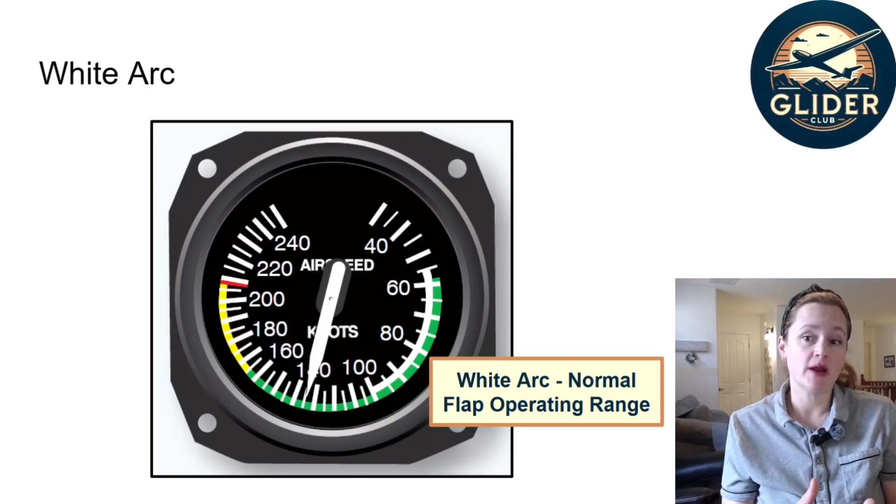Let's start with the white arc, and that is the flap operating range. On this aircraft, it goes from 55 to 100 knots. And even though many gliders have either spoilers or dive brakes, the white arc is specifically for flaps. The bottom and the top of each arc have special V-speed names, and they're written in all capital letters with the letters of the specific speed written lower as a subscript.

The bottom of the white arc is your VSO or stall speed in the landing configuration. That's the stall speed with the power off if the aircraft has an engine, and with both the flaps and gear in the landing position, and that means down. The way I remember is that O stands for out. So it's the stall speed with the landing gear and flaps out.

At the top of the white arc, we have your VFE, or the maximum flap extended speed. Flaps extended, that's what FE stands for. We love landing with flaps because it lowers our stall speed, allowing for slower speeds during approach and landing, but we do have to be careful. While the flap mechanism is pretty tough, you can see how far it extends downward from that wing. So if you fly too fast, the air pressure on it can bend and damage that flap mechanism, and you don't want to do that.

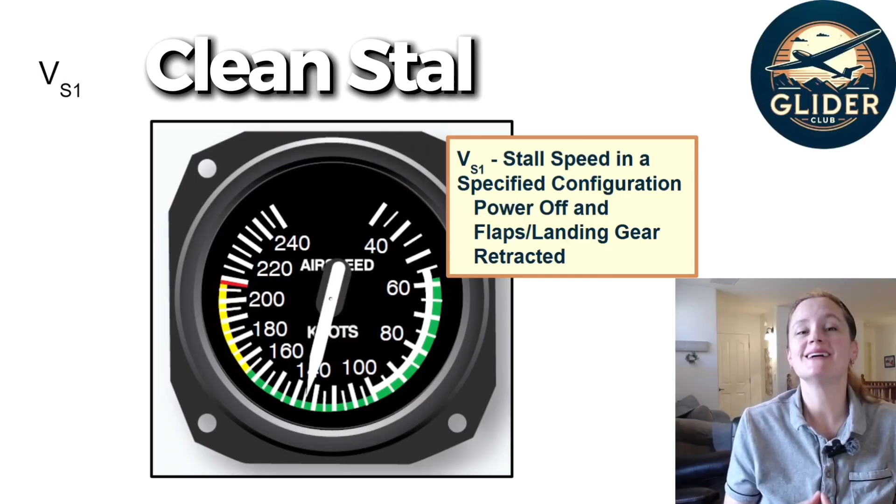Next is the green arc, the normal operating range. And on this aircraft, it goes from about 58 knots to 165 knots. At the bottom of the green arc is your VS1 speed, and the FAA says that's the stall speed in a specified configuration, which is with the power off, again if the glider has an engine, and the flaps and landing gear retracted. You'll also hear this referred to as the clean stall speed. The way I remember this one is to pretend that number 1 is actually a capital letter I that stands for in, I-N. So it's the stall speed with everything in.

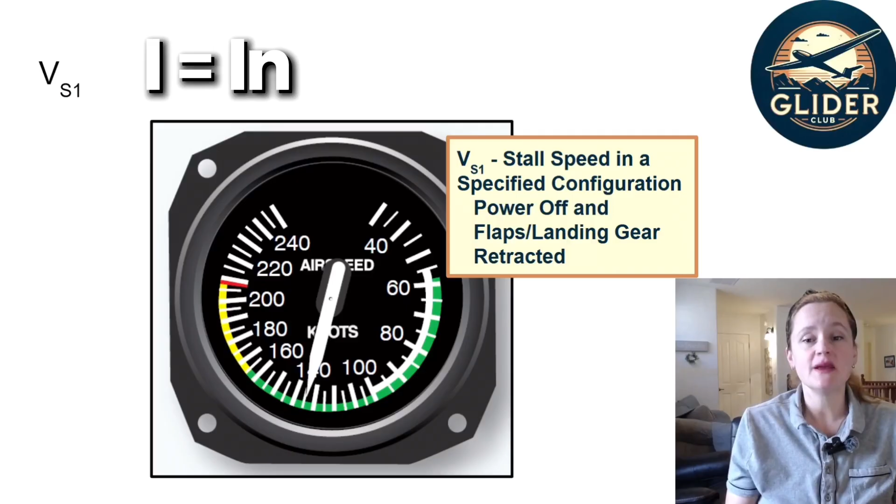At the top of that green arc, at 165 knots, is VNO, the maximum structural cruise speed. That's the speed where anything more than light turbulence could cause structural damage to your glider. Now for the yellow arc, the caution range, which goes here from 165 knots to about 208 knots for this aircraft. We already have a name for the bottom of the yellow arc, VNO.

So let's go to the top of the yellow arc, the red line, and we call that VNE, or your never exceed speed. And the FAA wants you to know that VNE is the maximum you can fly in calm air. So if you're flying on a particularly calm day, usually early in the morning or late in the afternoon, it might just be calm enough that you can fly your glider all the way up to that VNE, or your red line speed.

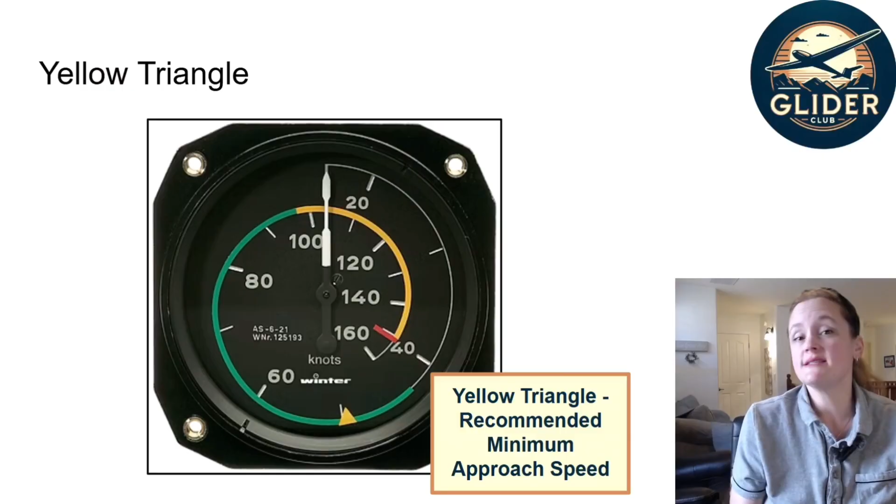In gliders, you'll often have an additional marking, a little yellow triangle, and this is the minimum recommended approach speed for when you're landing. You will often increase your approach speed based on the winds or sink at the time of your landing, but that is the minimum speed the manufacturer recommends.

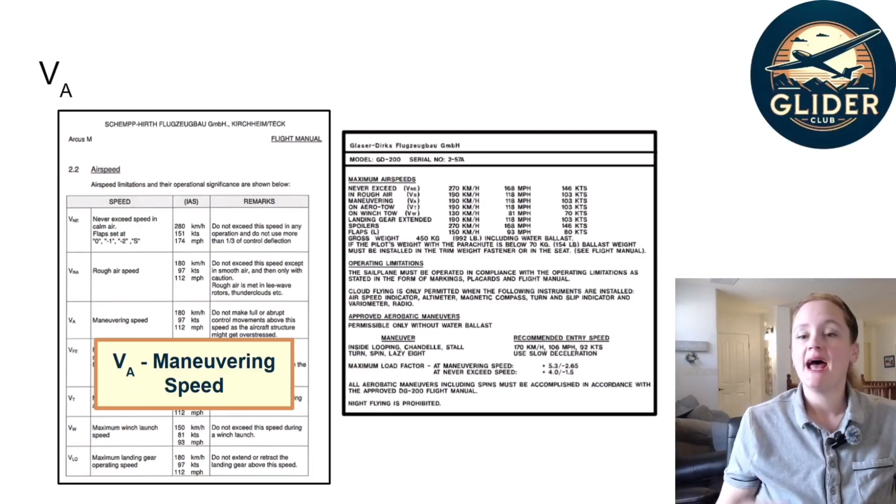Probably the most important airspeed that is not shown on your airspeed indicator is your VA, or your maneuvering speed. As we discussed before, that's the speed that if you fly below it, even severe turbulence won't cause damage to your glider. In fact, if you're flying at or below maneuvering speed, you could pull all the way back on your stick and the glider will stall before you can cause damage to it. But I wouldn't recommend it unless you want to scare your instructor.

Another airspeed limitation that isn't shown on the airspeed indicator is your VLE, or your maximum landing gear extended speed. And on gliders with retractable landing gear, flying too fast with the landing gear down can also damage it and damage the landing gear doors, which are actually pretty thin. You'll also have your max speed when you're on aerotow and another for when you're doing a winch or an auto launch. And these are to limit the stress on that tow hook mechanism and the structure where it's mounted to the glider. Now, let's look at how the FAA will ask you about these on your knowledge test.

And the FAA has lots of ways they can ask you these questions to make sure that you understand these speeds. The FAA can ask you about the color of an arc, the name of an arc, the symbol for a V speed, the definition of the V speed, or the numbers on the airspeed indicator. So the FAA really wants you to understand this.

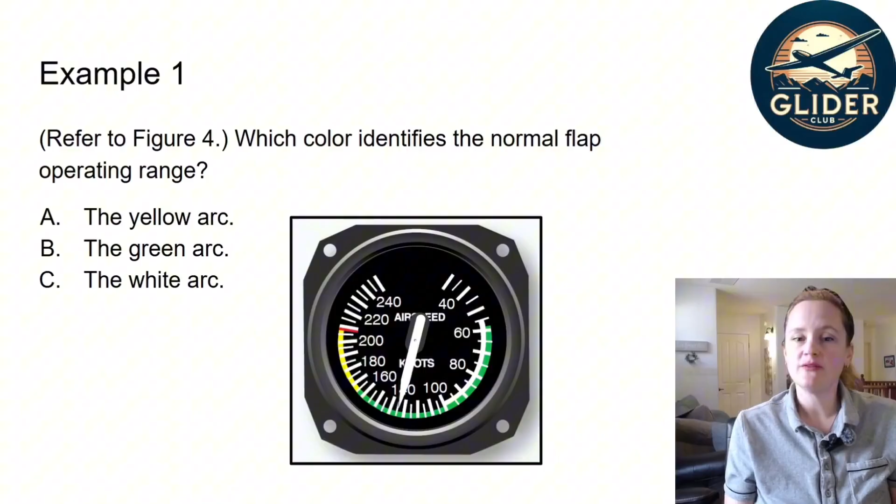Refer to Figure 4. Which color identifies the normal flap operating range? Well, that's the white arc, or C. And just remember, even if the question doesn't specifically tell you, you can always open your test booklet to that Figure 4 to help jog your memory. Seeing the airspeed indicator in front of you can keep you from getting tripped up by a tricky question.

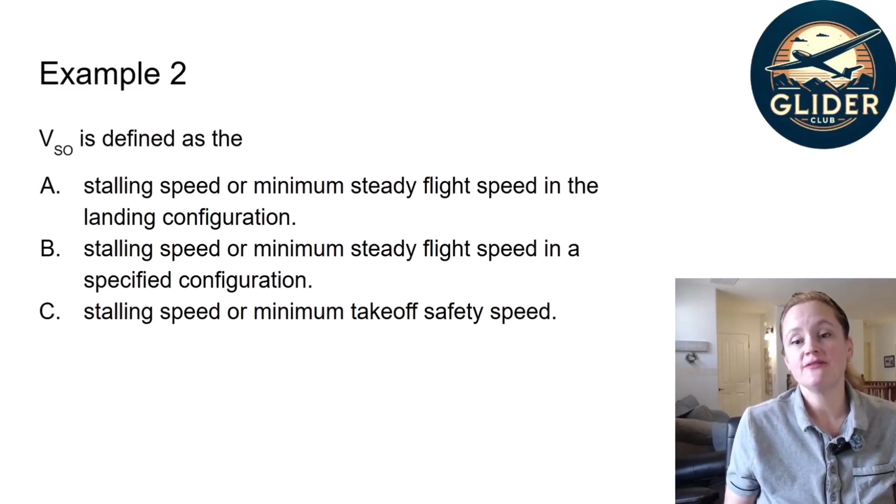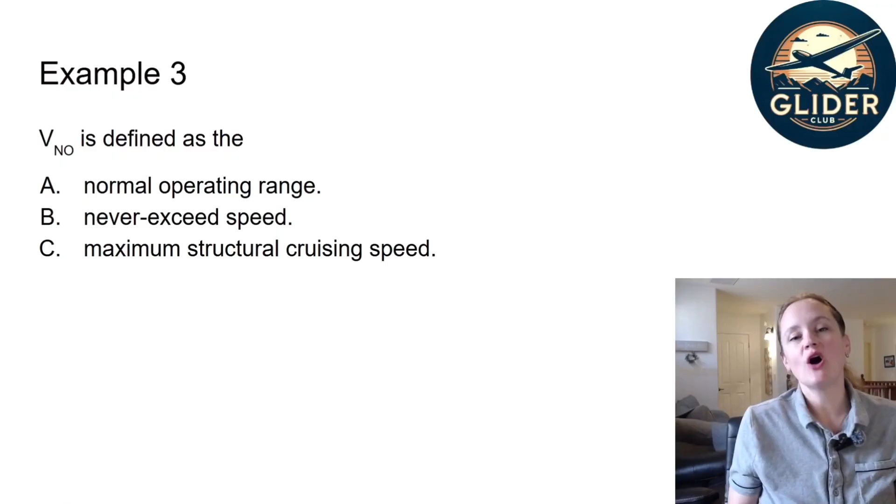VSO is defined as... remember, VSO means stall speed with the flaps and landing gear out. So it's A, stalling speed or the minimum steady flight speed in the landing configuration. VNO is defined as the... now be careful on this one. The FAA is trying to trick you because the green arc is the normal operating range. But the question is asking for the specific speed at that top of the green arc, the maximum structural cruising speed, and you can also use Figure 4 for this one.

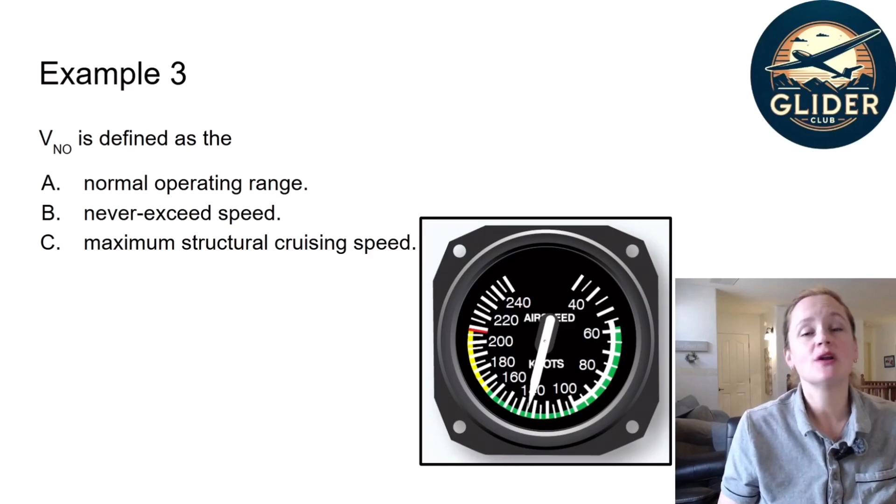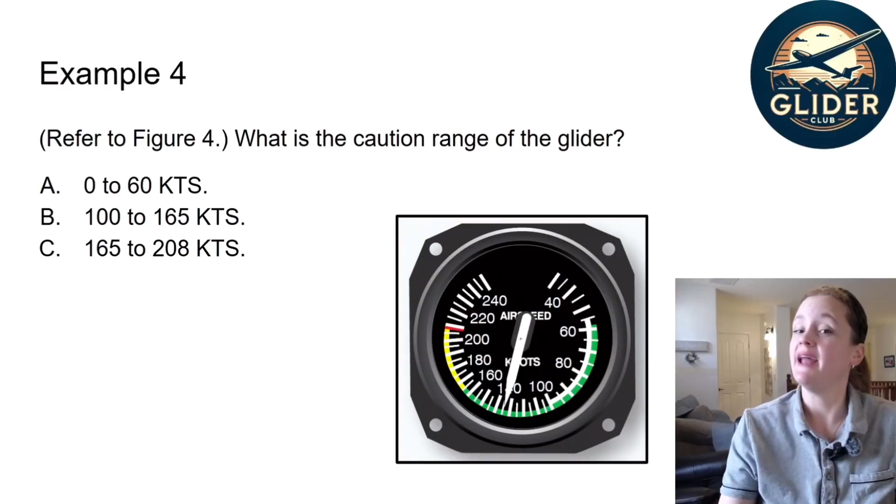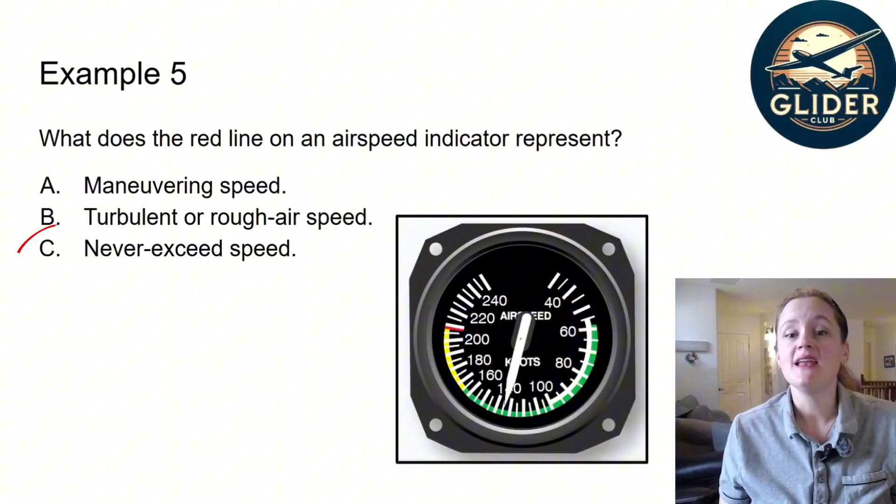What is the caution range of the glider? Well, that's easy. The caution range is just the yellow arc, and it looks like it starts on that shorter white line above the 160 number. So that's 165, and it goes up above 200, so about 208, and that's answer C, 165 to 208 knots. What does the red line on an airspeed indicator represent? Open your test booklet to Figure 4 to help yourself out here. It's the very last thing marked on the airspeed indicator. It's red. So that is C, the never exceed speed.